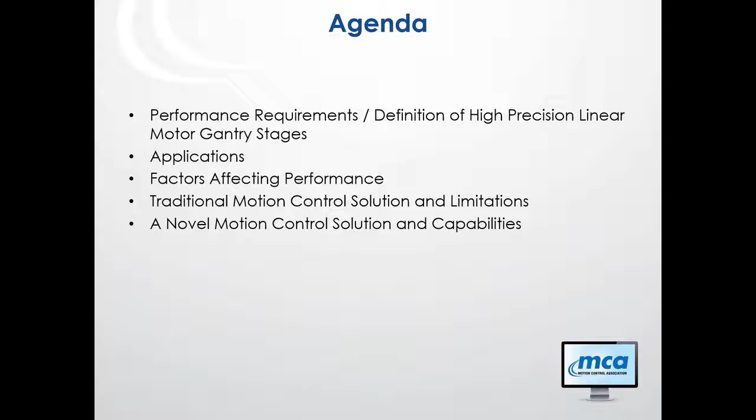So let's go ahead and I'll start with the performance requirements. So when I, or we at ACS, talk about a precision or high precision linear motor gantry stage or system, high precision from our point of view is actually talking down to the nanometer level in today's most demanding applications.

So examples of requirements from the application that eventually justify the use of this type of stage would be, you have to move and settle a device, might be an inspection head or a printing nozzle.

You have to be able to move and settle with accelerations upwards of 2 Gs or more, velocities on the order of 2 meters per second or more. The actual motions for these types of move and settle moves can be very short, from submicron if you're moving just to different locations on a single die in a semiconductor application, to, of course, very long moves that can be on the order of many millimeters or even up to meters or more in length.

We also talk about settling windows for these types of applications. So if you move from point A to point B, the settling window actually defines how close do you have to be to point B in order to consider the motion complete. In applications we see today, we see settling windows on the order of plus minus 50 nanometers as the maximum allowable error, or it can even be less than 50 nanometers.

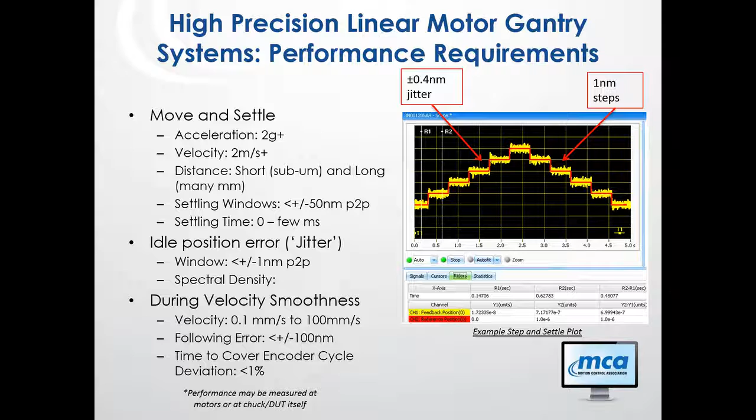Next I'll do a brief summary of applications. At ACS, we have expertise in certain types of applications. There are others as well, but what we have experience with are advanced semiconductor inspection and metrology applications - inspecting a patterned wafer, a lithographic mask, or a flat panel display. There are different technologies for doing these types of inspection or metrology measurements.

E-beam is arguably the leading technology for wafer, semiconductor, and mask inspection. There's also scanning electron microscope and focused ion beam techniques. There are high-resolution optical inspection applications as well, and also X-ray, which allows you to view inside of the materials and look at defects not only on the surface but also throughout the entire material, which is important for 3D system on chip applications.

Lithography itself, the process of generating masks for wafer manufacturing, is also a large field of sub-applications for high precision gantry, linear motor gantry stages. Some of the technologies there are again E-beam, deep ultraviolet, or extreme ultraviolet, which is kind of the cutting edge today. Also there's direct laser writing, which is a type of maskless lithography that's becoming more widely adopted.

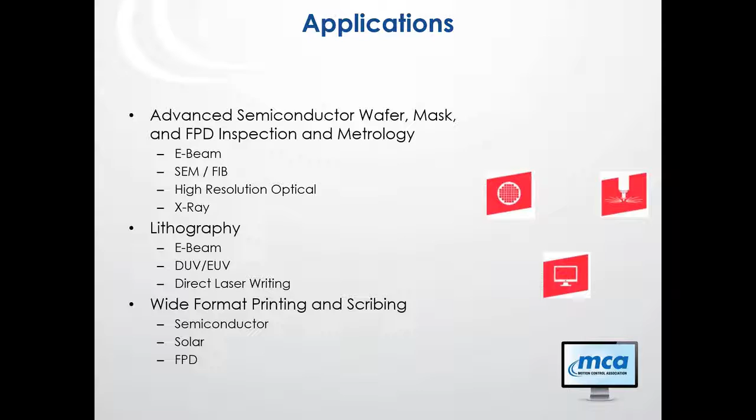Next I want to start talking about what are the factors that actually affect the achievable performance in these types of applications - what limits the control system from achieving the desired performance? There's a variety of factors. Resonances are probably one of the most easily recognizable by the control system.

A stage itself, a linear motor gantry stage, consists typically of an X and an X prime and a Y linear motor axes, or Y, Y prime and X, whichever configuration is needed for the application.

All of those axes have their own resonant frequencies, so the stage mechanics themselves have resonant frequencies. The frame or base, the platform this motion system sits on, often made of granite and possibly sitting on a passive or active isolation system, also has its own resonant frequencies. A lesser known and lesser studied resonance in these types of systems, but one that we at ACS have been focusing on more recently, is actually the cabling.

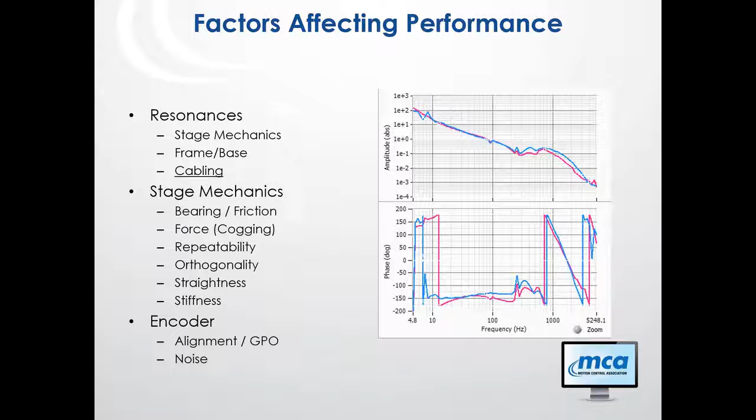This is designed to basically show the electromechanical signature of a single axis, or it could be a multi-axis system, where we are plotting the overall gain of that system as a function of frequency, starting at low frequencies on the left, going to high frequencies on the right. This is actually taken from a tool in our software environment that we use to optimize the performance of motion control axes.

Here I'm going into a little bit more detail about the factors affecting performance. The control system has a huge impact on performance, and that's ACS's specialty. The servo algorithms themselves have a big impact on achievable performance. PID is the well-known traditional classical feedback type control, the standard in most of the motion control industry. But a growing number of companies are adopting adaptive or state space type control algorithms, ACS being one of those companies, and the power and sophistication of that servo algorithm has a huge impact on performance.

The sampling and update rate is important too. Almost every control system and amplifier on the market today uses digital control, certainly for position and velocity loops, and for most amplifiers in the current loop as well. The rate at which you can sample that information and process it is important, and the faster the rate, the more information you have, the better you can control and the higher bandwidth you can achieve. So those are important specs to look at if you're considering a motion controller or a servo drive or amplifier.

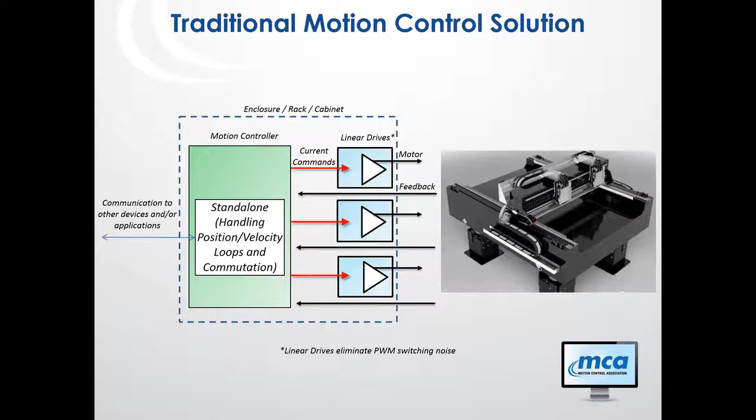Looking at this from a hardware point of view rather than architectural, here's an example of a controller and some drives sitting in a cabinet. The controller communicates with the drives, either through network communication or discrete, even analog, signals. Then there's a power supply providing both the logic power for these devices and the power that's ultimately used to generate power for the motor—the bus voltage.

The encoder cables and motor cables, along with the associated cable management system on the gantry, are actually a contributing factor to performance degradation because of the resonance of those cables—since they're moving, their properties and resonant frequencies change depending on where you are on the stage. These moving cables oscillate, generally at low frequencies, which poses a problem for the control system. You generally want to avoid having resonant frequencies within the bandwidth of the control system or the servo bandwidth, and that frequency changes depending on where the motors are.

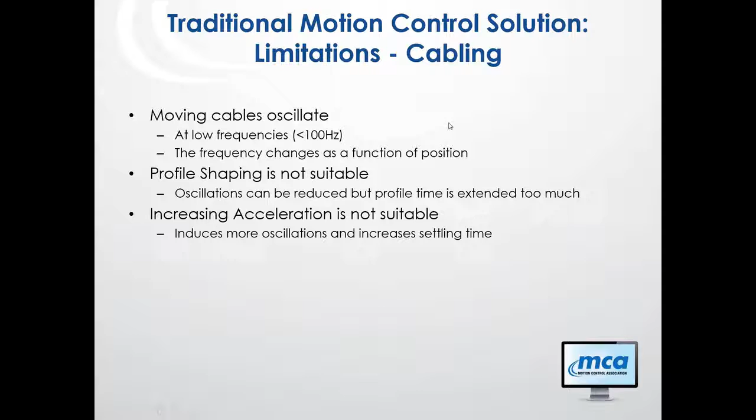So the cabling has some real limitations that factor into performance. The other factor I touched on briefly is the drive technology. Linear drives have the nice benefit of not having PWM switching noise, but by their nature they're relatively inefficient—they don't use switching transistors, which are very efficient, but rather transistors operating in the active region, or the always-on region.

So they're always dissipating heat. And if you look at any linear amplifier, whether it's an audio amplifier or a motor amplifier, if it's a linear amplifier, you typically see a heatsink, and you might even see fans as well. That's just because the fundamental physics of a linear amplifier inherently has some heat associated with it that needs to be dissipated. And as a function of needing to dissipate that heat, that type of amplifier is generally pretty large and pretty heavy compared to a PWM alternative.

So there's benefits to linear amplifiers and benefits to PWM amplifiers, but for these real high precision systems, the linear amplifiers are generally used. But the linear amplifiers, of course, are by nature not suitable for being distributable.

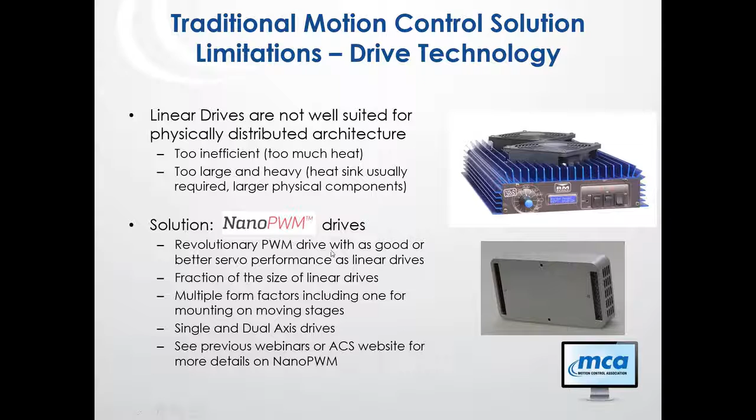Our network of choice for communicating to amplifiers is EtherCAT, and we actually send the motion profile out over the EtherCAT network, and then the drives receive those commands and handle all of the servo loops locally. Those drives have the direct interface to the motor and the feedback devices. And as I mentioned, we've developed these Nano PWM drives in both dual and single axis form factor, so that a single box can run either two or one linear motor directly.

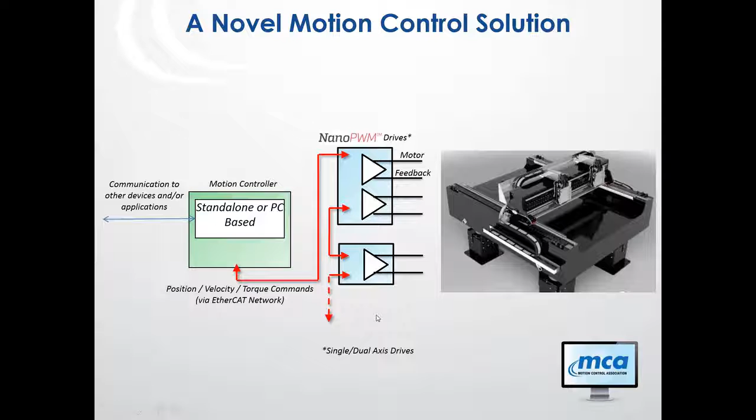So where I hope you see the uniqueness of the solution is given on this slide, where actually, as opposed to the traditional approach to this type of application, where you've got the controller and the drive sitting in a cabinet, and then you've got all of these encoder and motor cables running out into the machine and into the gantry system.

Instead of that approach, what we now are able to offer with these Nano PWM distributed amplifiers is to have the controller, which is a relatively small box that's just responsible for logic processing and generating profiles and monitoring the system, communicating out to the drives with a network cable. It actually just uses standard EtherCAT hardware, Cat5 or standard Ethernet. So you've just got simply an Ethernet cable running out to the drives, and the drives themselves are then mounted onto the stage.

So the idea is that you have one drive which is responsible for controlling two axes, and that drive is mounted on one side of the gantry where it's right next to one of the motors, and then you route the cables from the other motors to that drive. So those cables are never moving. It's static, the connection from the motors to that drive.

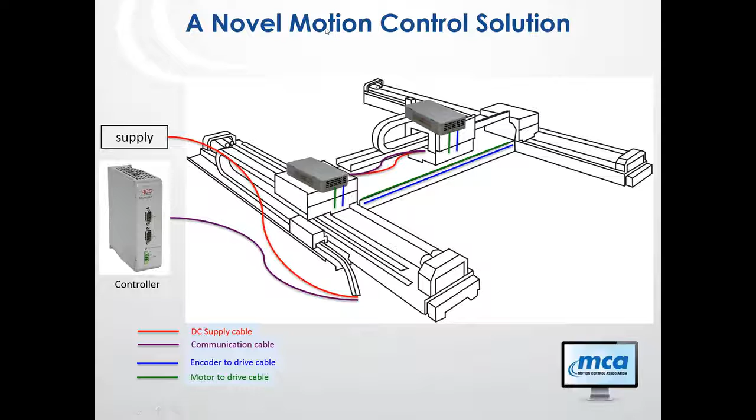So that is the new control solution that we have presented to the market, and I now just want to give a few more comments about the capabilities enabled by that type of solution.

One of them is that by controlling the gantry, the X and X prime axes together from a single drive, we can offer a unique type of multi-input, multi-output control, where instead of controlling the two axes independently, we actually control it as a single system, controlling the linear or X motion, and also the yaw, which is the displacement between the two sides. It turns out that controlling a gantry in that way offers a lot of benefits from the performance point of view, primarily because the two servo loops are decoupled and independent from one another.

It's also possible to use the cross-axis position to compensate or adjust that control algorithm. So if you have a large moving mass, that of course impacts the dynamics of the gantry system. That type of control algorithm is suitable for both flexible and stiff gantry systems. Traditionally, you design a gantry system to be as stiff as possible, so that you can mechanically design the resonances to be at relatively high frequencies.

But by controlling a gantry system this way, with multi-input, multi-output control, we're actually able to get the same level or even potentially better performance by having a flexible gantry, designed to have some flex between the two linear axes, X and X prime. That actually makes it potentially easier for the mechanical designer to employ a control system like this. And as I said, that's enabled by having these multi-axis drive form factors, where they control the multiple axes as a single system and not as independent axes.

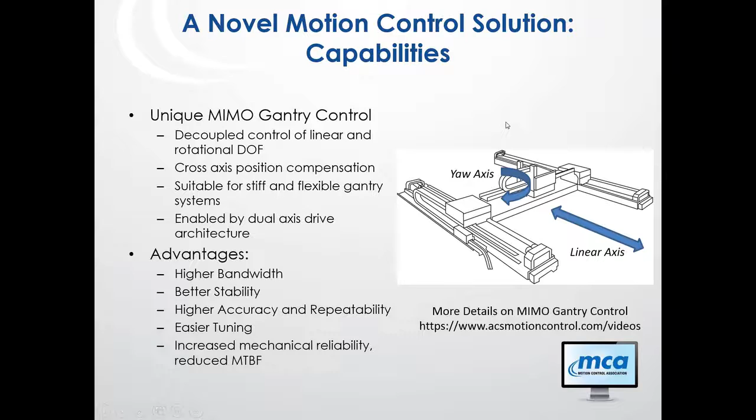All right, I'm just about finished here. I think a couple more slides, but I want to also talk about the capabilities in terms of actual achievable performance, right? So by reducing the cost and length of these cables, we effectively eliminate the motor and encoder cables, except to just get from the encoder to the motor to the drive, which is located very close. So by using just Ethernet and DC power cables in the system, we now make the cabling much smaller, much easier, and less expensive to manage.

Also, those cables that remain are much smaller and generally resonate at much higher frequencies because of their lower mass. So that's really important—if you choose not to use the slip ring or slip bar to completely eliminate them, those cables will still resonate, but at much higher frequencies.

The control system is able to achieve much higher bandwidths because of that. And then the profile shaping, or the higher accelerations, are now possible because of that reduced weight or reduced moving mass.

You also don't have to worry about residual forces on the stage. Anyone who's worked with a stage that has a fair amount of cable management might be familiar with this—the cable management itself, when the system's not under control, might drag the system to some default position just because of the flex of the cables, mechanically wanting to be in their optimal equilibrium position when not being controlled. So now you don't have to worry about that residual force based on cable management.

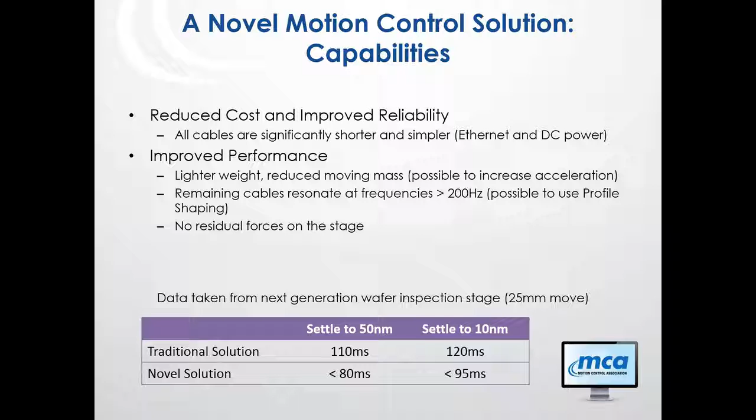Okay, so this is my last slide. The conclusion here is that I'm proud and grateful for the opportunity to present this innovative, and potentially game-changing, solution for stage manufacturers or OEMs using precision linear motor gantry stages, generally employed in next-generation equipment in the markets I mentioned earlier.

We feel we're able to achieve some of the performance requirements in these next-generation applications that a traditional motion control system is not able to achieve, just because of fundamental physical limitations.

Based on the solution presented, a high precision gantry positioning stage can achieve these levels of performance in terms of accuracy, move and settle, standstill jitter, and following error during motion—and ultimately lower cost of ownership and cost of goods. These are all benefits that can be realized by this type of solution.